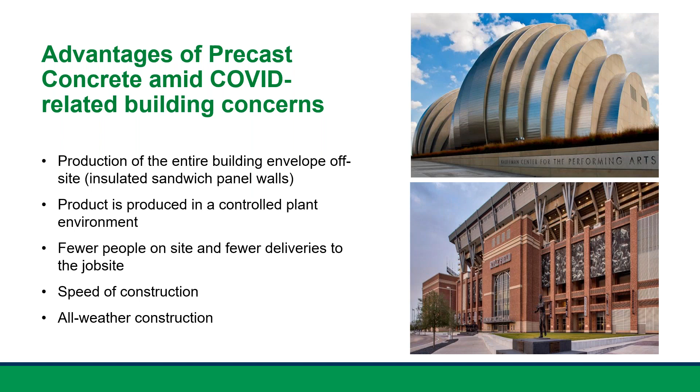Another goal we saw was having fewer people on sites and fewer deliveries to the job site. These panels ship out to job sites on flatbed trucks. They're typically very large panels, so there are fewer deliveries. As far as an on-site crew, you've got about half a dozen people - a crane operator, a few iron workers - really a minimum crew working on that job site.

Speed of construction became an important aspect. There was a goal to get on and off these job sites as quickly as possible. With precast, you've got 9 to 14 panels a day going up, so these projects do go up remarkably fast.

The aspect that became very important during the pandemic was the all-weather construction aspect of precast. A major challenge was that schedules were moving around on all the projects - delayed because of uncertainty, then picking up abruptly and in a big hurry, or delayed because of other trades or supply issues. Typically with other materials, you have that dead of winter period from December to February where you just have to stop. But with precast, as long as the footings and foundations are in place, they can install all year round. That's a huge benefit because you can get your enclosed building by winter, or even during winter. That's enough about the pandemic.

Let's talk about aesthetics.

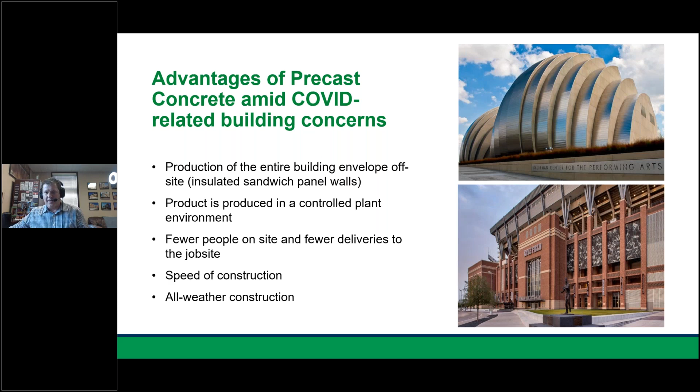What you see here on your screen is the 4 primary precast finishes, and I'll start at the top. Sandblast is the most common finish in the industry. There's light, medium, and heavy sandblast.

Each yields a slightly different appearance. It's an abrasive blast technique that starts to expose some of the rock to varying degrees. It's a more dull appearance.

Then you can do what's called an exposed aggregate finish, where a chemical retarder is sprayed in the bottom of the production bed. It keeps that surface fraction of an inch of concrete from curing. So when the panel is extracted out of the bed, because it is poured exterior face down, premium face down, they wash that surface concrete off and it exposes that rough rock.

Then you can do what's called an acid etch finish, which is a liquid-based application. It is the least invasive finish. It just knocks off the form finish, gives it a nice consistent appearance. It's many designers' favorite finish. It's my personal favorite finish.

And there's things you can do with mica sands and silica sands that can give it a glimmering appearance, almost like a sugar cube. And then there's also polished. We traditionally haven't done a lot of polished finish just because it's a machine process similar to granite, so that extra step makes it a bit more expensive.

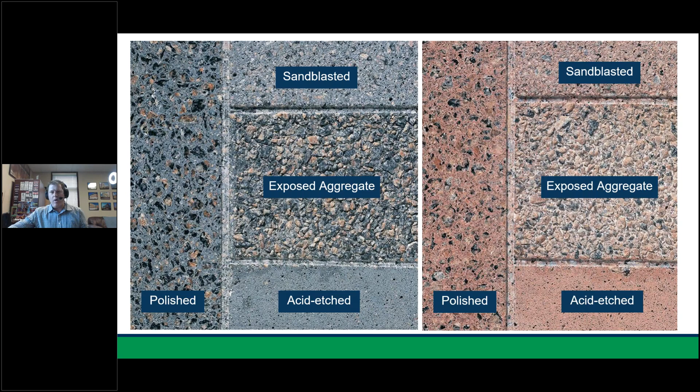We also encourage the articulation through forms, and whether you're going for a more traditional look or a more contemporary look for your school, this is something we really encourage to get you out of just that typical flat panel, flat plane design. You're literally only limited by your imagination with what you can do. You can get into quite a bit of detail.

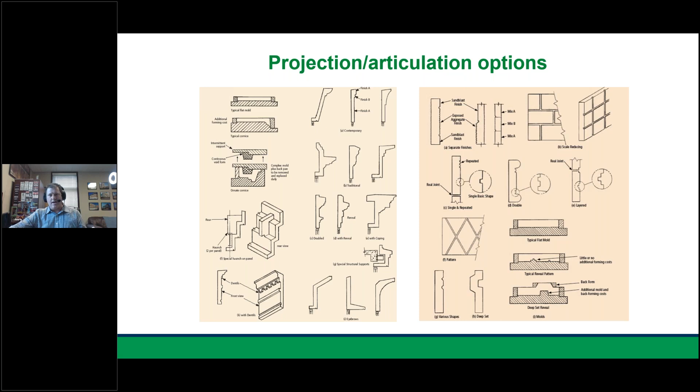What takes that additional projection and additional formwork and makes that less cost prohibitive is repetition. You can see on this project, they had some cornice work, some sills, some additional detail around the windows. But if you notice, they did that again and again. So repetition is a pretty big deal in the precast business, and that is a strategy to keep your projects within a reasonable cost range.

Another tool in the toolbox that you have are form liners, and these can be done with standard form liners, and you can also do customs. This IRS Service Center used a custom board form that was built in the production facility, and it employed another strategy we talked about earlier: the raised portions are acid etch finished, the lower portions are exposed aggregate. So you had two finishes in the same panel and the use of a form.

For Sporting KC's training facility, that's a soccer club in Kansas City, they have a diamond as part of their logo, and they wanted that branding to be part of their facility. So they did something a bit on the extreme side - that's actually a 7.5-inch projection on that custom form liner, but it yielded a striking result. Anytime it's hit in different times of the day with the sun, it's always got a different look, and it is a very visually impressive building.

And that's an example of something you can do with a custom form liner, but you can still see, even though it's custom, they utilize the repetition.

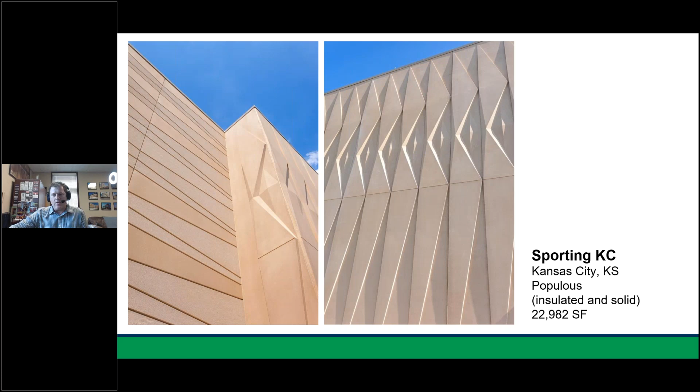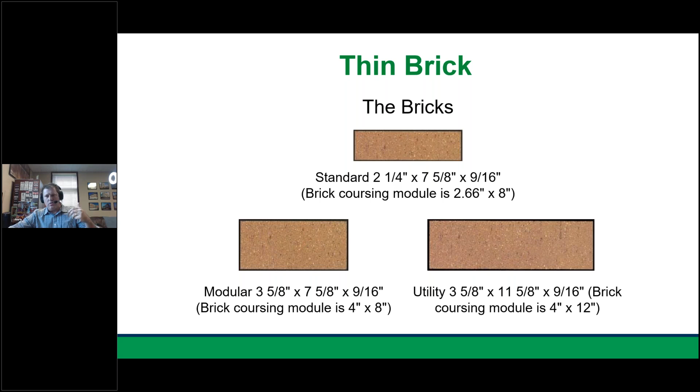Thin brick is another great tool in that toolbox. Your typical sizes are going to be standard, modular, or utility. There's a wide range of colors and textures that you can choose from, and you're not limited to running bond with a single color. You can do arches, projections, random blends.

There's all kinds of great things you can do from an aesthetic standpoint. The way it works is you can see here them putting the thin brick into the production bed. There's a form liner that's put down, and that form liner has a little curved lip on the edge that emulates a tuck point. Then when the concrete is poured directly on top of that, after the reinforcing is put into place, it bonds with the back of those grooves on those thin brick.

You can see on the right how they handle corner pieces to pull off that illusion that you're looking at a full brick, but it's actually about one fifth of a brick. So it's more cost effective, it's more efficient, and it's a bit greener because you've got a more lean, mean, and efficient design.

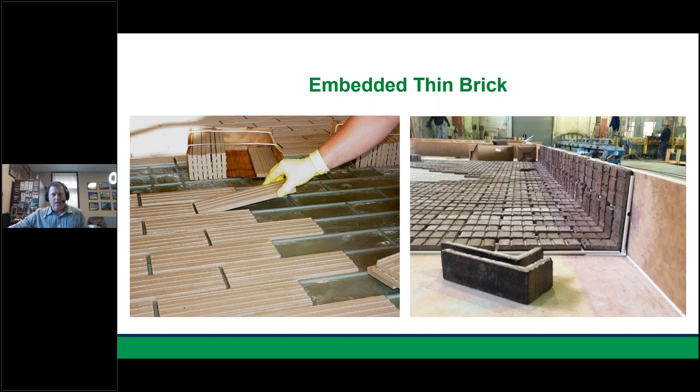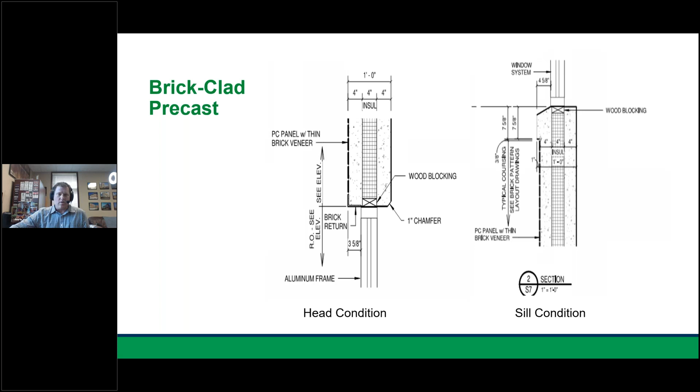In addition to having corner pieces, you can also have edge pieces at your head and sill conditions, and again, you can do arches. There's all kinds of strategies of what you can do with an embedded thin brick.

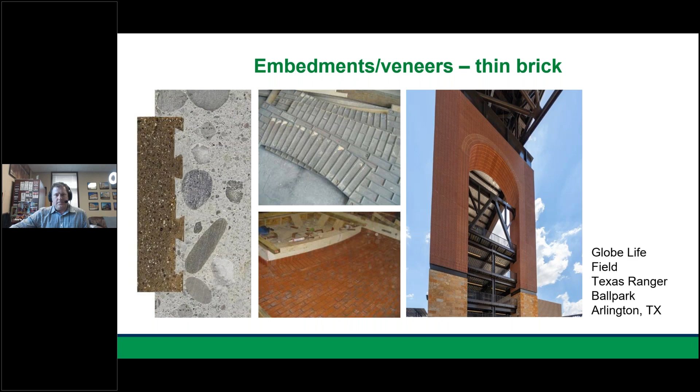Another tool you have, in addition to thin brick, is you can also embed stone or tile into your projects. The example on the left is actually a higher education school, a school of business out at UMKC, and this was originally envisioned as terracotta, and that is what you're seeing there is terracotta.

It was going to be set into a rain screen with an air barrier and a traditional wall built behind it, which would have been a non-precast solution. They realized they had a major budget issue with doing that, so the precaster was brought in to explore the idea of setting the terracotta into precast, which is done quite often now, but back then, around 8 years ago, it had not been done in the United States.

Through a lot of research, development, and testing, we did proceed on this project, and the terracotta was cast into an insulated sandwich panel. So you had the terracotta, 4 inches of concrete, 3 inches of insulation, another 4 inches of concrete, and it ended up creating a savings of over 30% on the building facade cost.

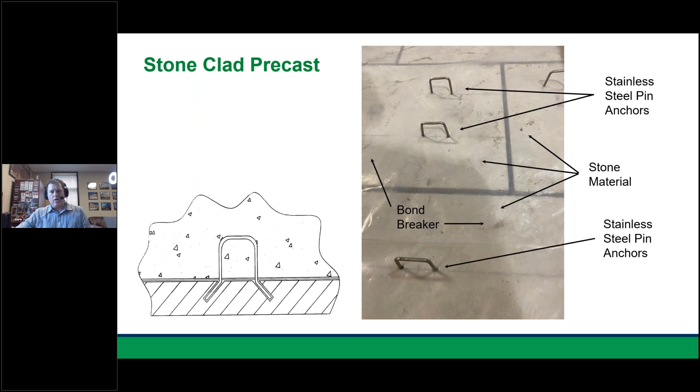So that is determined by the structural engineer for that specific solution. Another new finish we're seeing that could have some great application to schools or really any project is what's called the distressed finish. And this is something that is achieved with a powder at the bottom of the bed that actually gives the final appearance that grainy look.

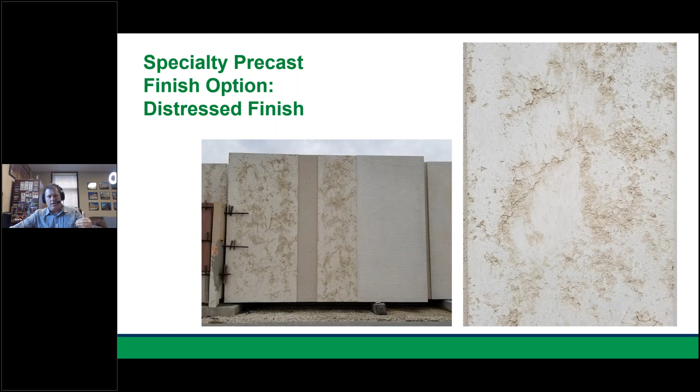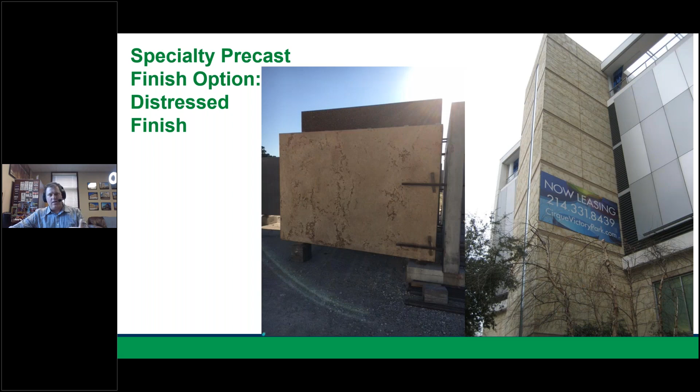Some architects have leveraged it through creative use of reveals. It can actually give the appearance of a natural stone, a travertine stone, but for a fraction of the cost of travertine. So we've seen it used that way on some projects.

On other projects, we have a partner in Texas called HKS Architects, and they just liked the look of it. So they wanted to use it more monolithically, so that it was used on a large scale in the Texas Rangers' new ballpark, which is where they played the World Series during the pandemic. And they used a few of those tools in the toolbox we talked about. You can see the thin brick there and these arched panels. You can see the distressed finish.

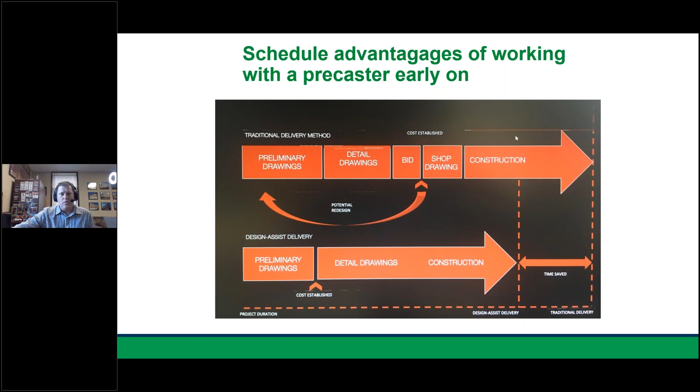So then all the other trades bid out at a later time, and you save a significant amount of time on your project, which with schools, they are time sensitive projects. They typically just have a certain window to build those projects, especially if it's an addition to an existing school. And there's obviously a lot of aesthetic flexibility with schools.

The sampling process typically starts out with a PCI color and texture selection guide. There are a number of 3-ring binders that are out there, but this also exists online on PCI's website, and many specific vendors host this information on their website as well. It's a good jumping on point because you can give a PCI producer a plate number based on those hundreds of choices you have in there, and then they can start to make physical samples, which we encourage.

The example at the bottom here, the precaster first did the sample on the left, then the architect said, we like it, but what would it look like if there were more dark aggregates? So they moved to the sample that you see there in the middle. And then they said, well, we like it, it's even better. Can we do a version where we punch up the dark aggregate a little bit more and go darker on the dye? So that's when the sample to the right was issued, and they said it's perfect.

They showed it to the owner, they got it approved, and they actually took a picture of that sample and they put it in with the specifications or with the addendum, and they even named the precaster as the basis of design.

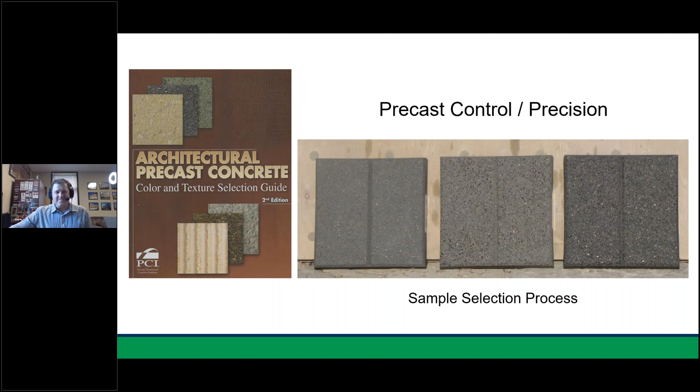Once a precaster's on board, though, they will commence a full mock-up process, and that is going to typically be at least a 4 foot by 4 foot panel, but we often see more elaborate mock-ups that are designed. Sometimes they want to show a window or different materials in the panel. It's a great process because you can really see what those reveals are going to look like, the depth of them, the size of them. There's sometimes even opportunities to make little tweaks at the last minute as well. So that's a very positive process, and it's emulating the full casting process. So that's important to see in your mix designs.

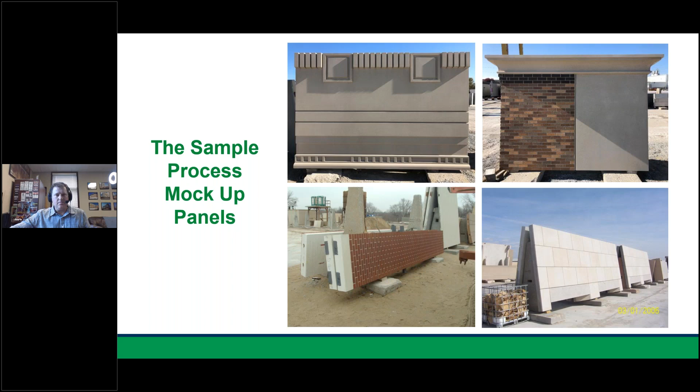With insulated sandwich panels, you have 2 wythes of concrete that are surrounding insulation. As somebody put it to me recently, he said, a precast sandwich panel, that's like precast on a diet. And it really is, because you've got something very efficient. It's going to be relatively light for a full building envelope system. You can put on the exterior either exposed precast with a finish, or in this case, you can see it's thin brick.

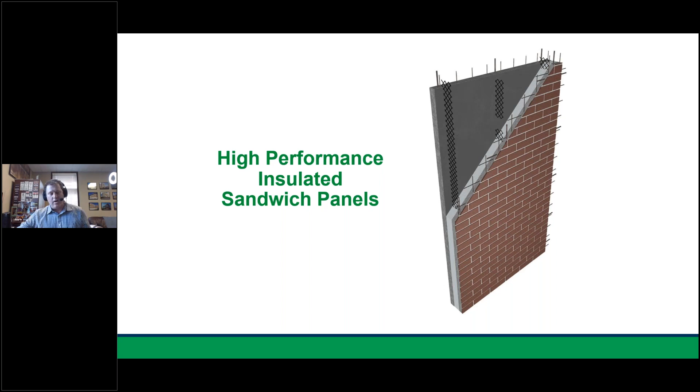It's going to be connected on the inside, there's a number of ways to connect it. It can be fiberglass pin connectors about every 24 inches on a grid system, or in this case, you're looking at a carbon fiber reinforcing grid that runs every 24 inches vertically, the entire height of the panel, giving it full composite action.

Another great benefit of precast, especially in schools that they know people are going to be in for a number of years, is the thermal mass effect. So you can see here the day-to-day cycles of temperature in a building when the heat is actually turned off or turned down during the evenings. And what you see there in the orange is a conventional building, and you actually see some pretty significant swings in temperature during those off-peak hours when the systems aren't running.

With precast, on the other hand, what you're seeing there in blue, there's less of a temperature differential. The precast thermal mass flattens out daily temperature differentials and therefore reduces the heating and cooling loads of a building's HVAC system. And the way this occurs is you could almost think of it as a battery. That concrete is absorbing that heat during the day as a building is being heated. And when they shut down those systems in the evening, it actually begins to slowly release the heat into the interior spaces during the late afternoon or the evening when these buildings are empty.

So when they show up an hour before the kids are going to show up and they boot up those systems again, it's less work for the HVAC system in the morning to rebalance that temperature. So it's energy savings that they'll see many times over the course of the project.

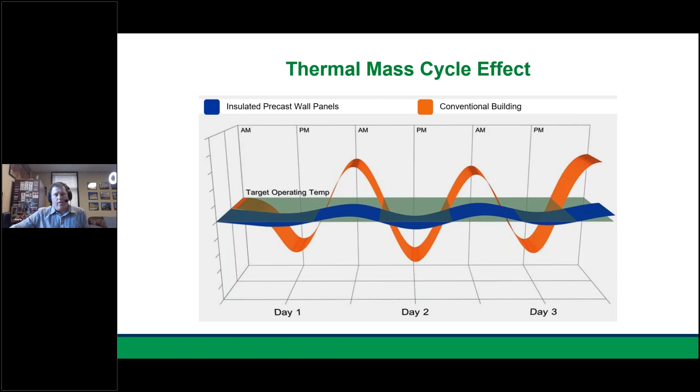There's a couple of ways to skin the cat with insulated sandwich panels. The top example you see here is what's called a non-composite panel. That is when you have a thick wythe of interior gray concrete, and it is doing all the structural loading and lateral loading and so forth. And then you've got on the exterior a thin veneer, and that thin veneer is actually just serving as a moisture barrier and as your exterior facade. It's not doing anything structurally. And then of course it's connected by a connector system, and that is a fine way to do things.

There's times on a high level FEMA high wind shelter where you want to do a non-composite panel for structural reasons. But all things being equal, another great way to do things is what's called composite panels. And that is where you have more equally spaced wythes of concrete that are connected in a way that they are actually sharing the loading on each side. So that's literally acting as one panel. So the advantage of composite is you can essentially, in some cases, do the same thing structurally, but it can be done with less concrete.

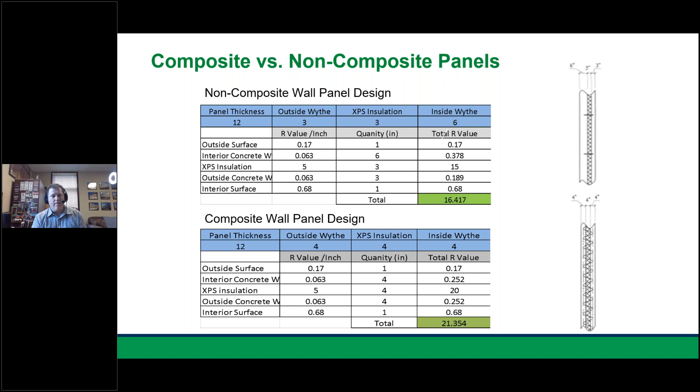And R value, obviously not to be confused with thermal mass. R value is the thermal resistance in a panel. You want your R value to be as high as possible. And thermal resistance can also be measured in a U factor, which is thermal transmittance. So you'd want your U factor to actually be as low as possible.

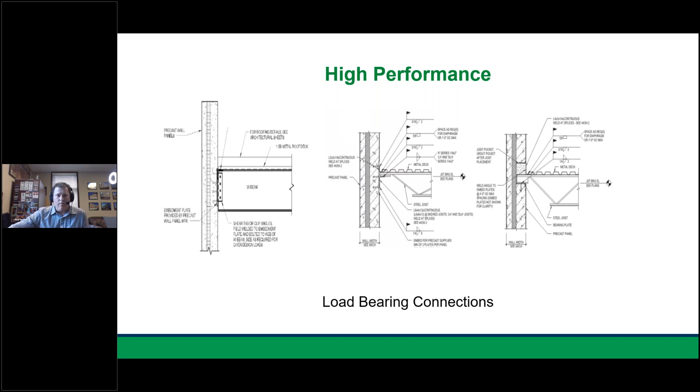And there's a few ways to go with load-bearing panels. And here's a few examples. You've got embeds that are going to be set into the precast. It can be either directly welded. There can be an L-shaped steel piece that the joist can sit on top of, or there can be pockets. And your precaster or precast structural engineer or engineer of record can help you as an architect to make that best decision for your project.

But one thing I will tell you, if you're working with composite panels, a good chance something you'll run into eventually is a situation where there is an embed or a slotted connection that needs to fit on the interior but doesn't have quite enough space. And in that case, you can actually notch into the insulation. It's okay to do it just in a small zone.

You can even get it down to 1 inch, but the key is to not fully break that insulation. You want to continue the continuous insulation per the ASHRAE standards. You want to maintain that thermal break and not have any kind of thermal bridge between the panels. So that's just something to watch out for during the shop drawing process.

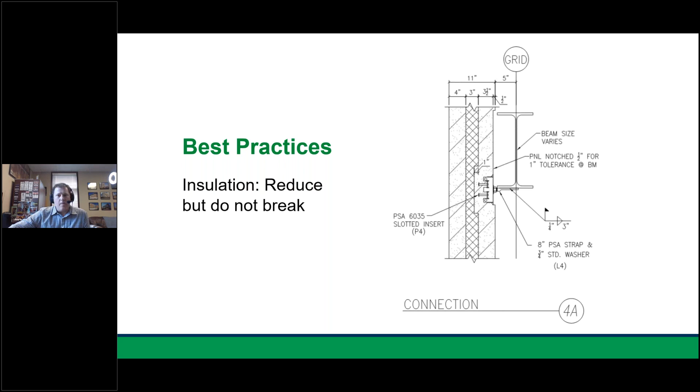There's a few ways you can go on the corners. The left is a miter joint, which is a nice way to dress up an integral color panel. L-shaped pieces can be done. That's a little bit of an extra step. It would be a 2-day pour. They'd pour one side, then the other side the next day. They would turn it up, pour the other side the next day with a cold joint.

We see that a lot on column covers where they want to have 2 pieces that go together instead of 4 pieces. And you can do the traditional butt joint. If you're doing a thin brick project, you'd want to do a butt joint as opposed to a mitered joint so that you can really sell that illusion of that thin brick being a full brick.

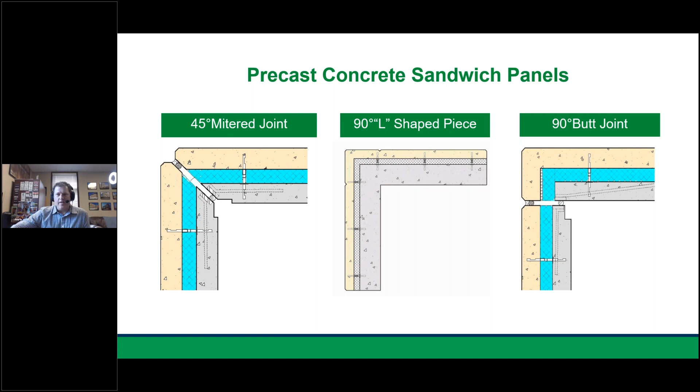We're not going to talk a lot about high wind structures. There's been some other hour-long seminars that have covered that quite thoroughly, but I did want to say what we typically see for precast: you will see a gymnasium area like you see in the blue here on the bottom of the screen, where they'll take a high volume space, they'll put a double T roof in it, it'll have proximity to restrooms, and that will serve as your high wind structure. These tend to be very beefy, very heavy panels, but they work really well.

An interesting trend that we're starting to see around Iowa and Nebraska is architects are figuring out if they actually take a lower volume space and make that their FEMA shelter, like you see in the yellow, either a multi-purpose room, a cluster of classrooms, maybe a library, something ideally with proximity to restrooms, they can do it with lower walls, and so they've got less premium wall space. It's something that's done for economy. It keeps the cost down.

In some cases, they'll use a steel roof instead of a double T roof. I can't get a lot into the specifics of cost because of some antitrust stuff, and there may be some debate the way cost trends are going now whether you're really getting any savings with a steel truss roof. But that is something to look at when you're really pinching pennies on projects.

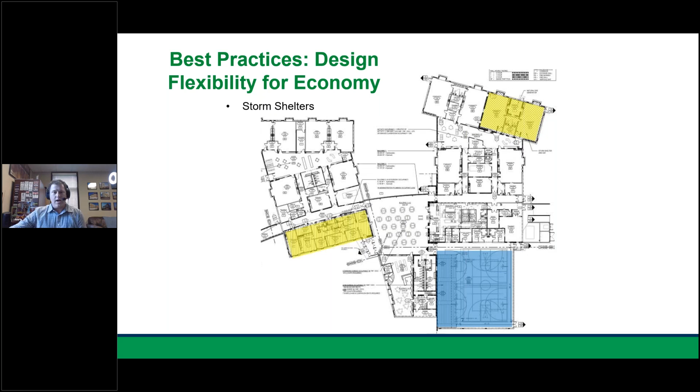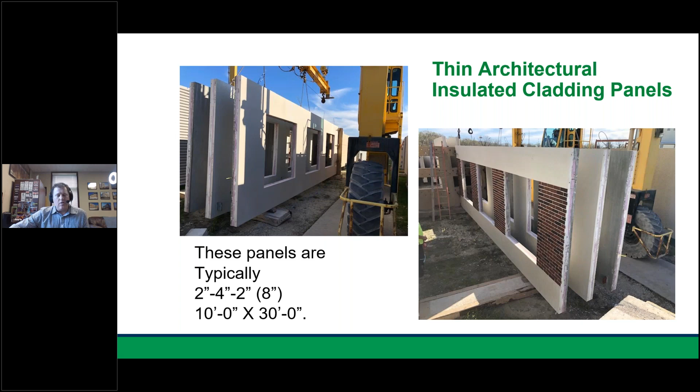You're cutting your concrete in half, so your panels are going to weigh less. There's going to be less shipments to the job site, a little bit less of a crane that you'll need to install those, and they can even right size the footings and foundations, because at 50 pounds a square foot, that is actually less than it would weigh to do a conventional masonry system with a backing wall built behind it. So I would encourage you to talk to your local precasters about that option.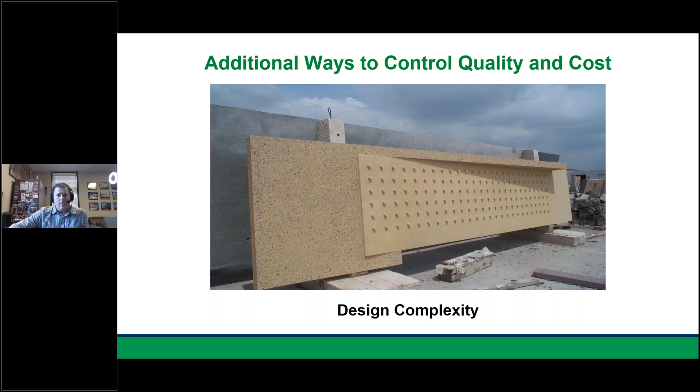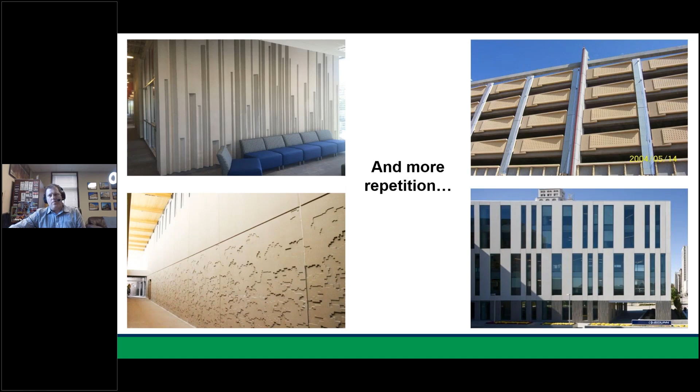And I'll circle back to the idea of taking these complex panels like this with curves, multiple mix designs or multiple finishes, board form patterns. The way to see some economy in doing that is through repetition, whether it be a high-end parking structure or with form liners, board forms, similarity of pieces. That's a way to control some cost.

So I'm going to cap this hour here with a quick discussion on PCI certification, and I want to leave some time to ask questions. So PCI is an organization that, in order to belong to, members get 2 unannounced audits per year.

They basically don't know when the independent inspectors are showing up. They take the shop drawings out of the foreman's hands. They check the curing, the reinforcing strength, the quality. They talk about safety, finish capabilities, and it's something that in order to belong to it, you just really have to maintain a high standard. So that's the benefits of PCI.

They revamped their system about a year ago because of new technology advancement that allowed for even higher standards. So it was a way to align producers based on their capabilities. They got feedback from over 160 producers, architects, and contractors who work with precast a lot and had a lot of opinions, and that went into effect October of last year.

So the previous categories were A1, which was a bit of a catch-all for architectural panels, CA, which was more industrial panels, warehouses, stadiums, double Ts, and AT, which is small projects, trim units. So what's happened is A1 and CA have been broken up into 4 categories, and that is what's called AA. That has a heightened tolerance that didn't exist before, with great emphasis on shapes and complexity.

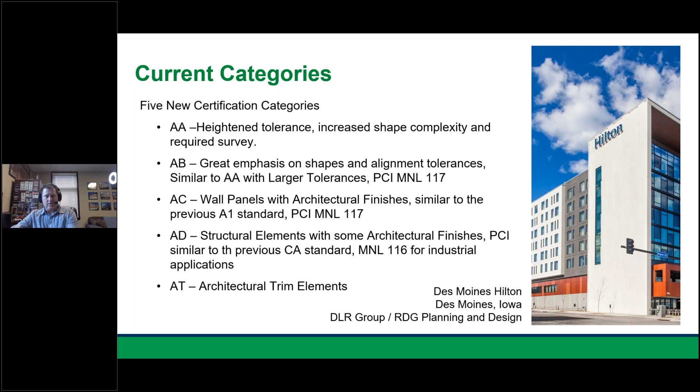So I think this will come together for you a little bit here. Going left to right, AD projects are going to be your warehouses, your more simplified big box stores. They do allow you to do an architectural finish and thin brick, but for all practical purposes, most AD projects are going to be structural gray projects that are field painted.

With AC, you've got more of your typical architectural panels. You can do a finish, or more than one finish on the same panel. So some of your more simple schools are going to fall into that AC category. Depending on how much complexity you've got on your school facade, you might consider AB.

AB is where you can start to do curves. You can start to embed other materials like stone and terracotta, so you can embed things besides thin brick. There's more emphasis on projections and shapes, whereas AC panels tend to be a little more flat in nature.

And then there's AA, which is kind of like that on steroids. It's a tighter tolerance that has not existed before. These would be your campus performing arts centers, your cathedrals—the projects that are so particular and have so much scrutiny, they have to go just right.

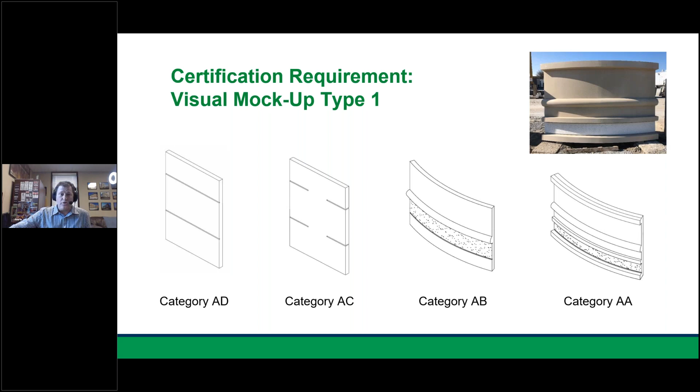Here you can start to see, in order to go through that certification process—there's an AA sample mock-up in the top right corner—but for AD, you need to be able to do a flat panel with a reveal. With AC, that reveal needs to turn the corner and stop abruptly. With AB, you need to be able to do more than one mix design in the same panel, do curves, and do projections. With AA, you do that with more detail and some additional tolerance. Same concept for thin brick, and a very similar concept for form liners.

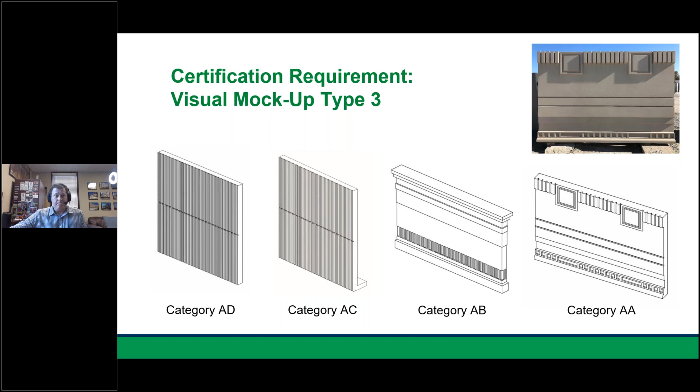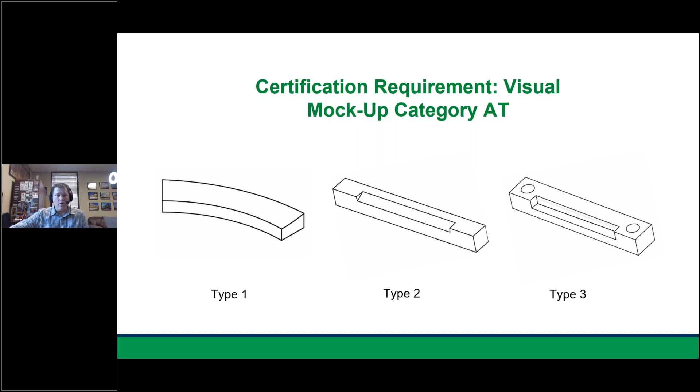With AT projects, that category has largely remained unchanged, but there is an emphasis on samples to make sure that they can do that project with the precision that is required.

We're not going to get real into the weeds here, but there's a whole manual that covers this. To give you a helicopter perspective on the tolerances, for panels over 20 feet long with AA, you're dealing with tolerances within 1/16 of an inch. With AB, it's the old 117 standard, which is 1/4 of an inch. Same with AC, and then with AD, that loosens up to 1/2 an inch.

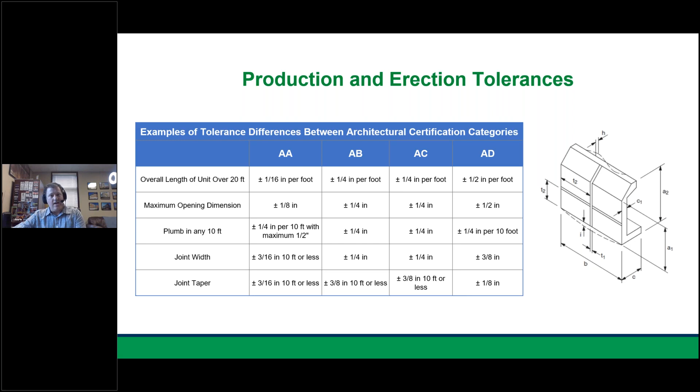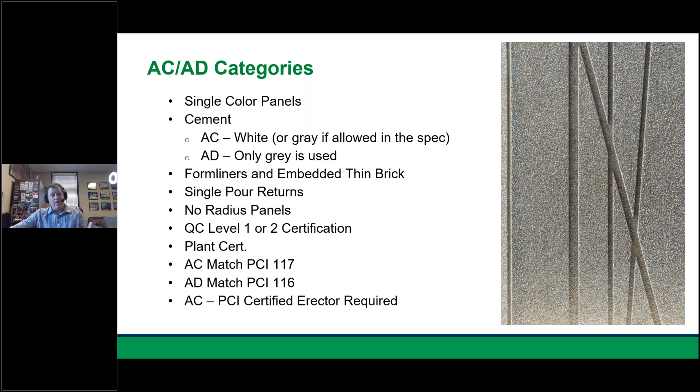For AC and AD categories, you've got single color panels. You can do thin brick, form liners, single pour returns. For anything AC and above, a PCI certified erector is going to be required.

When you step into the AA and AB categories, you're getting into multiple colors within a single panel. You can embed not just brick, but stone, tile, terracotta. You can do curved panels, those L-shaped pieces we talked about, and cold joint returns.

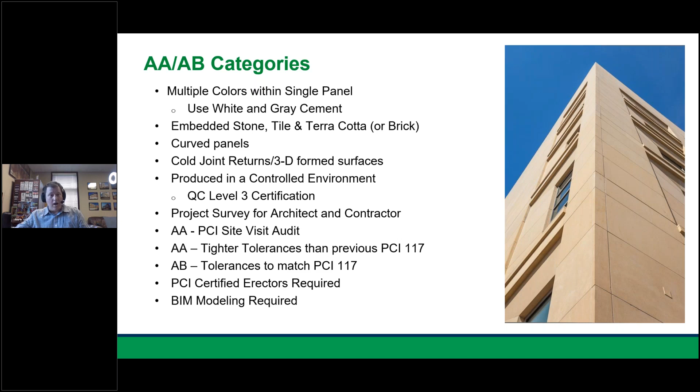AA steps into a tighter level of tolerance than has ever existed. These projects will have a project survey by an architect or contractor, which is a new level of accountability that didn't exist before. AA projects are also going to have a PCI site visit and audit for each project, which is an additional level of accountability.

For AB, this business school at the University of Kansas—if there's any KU fans here—is across the street from Allen Fieldhouse. You can see the projections here come out to an apex, a point, and it's interesting when the sun hits it at different times of the day. There's an emphasis on additional forms and tolerances, with each panel having a different theme—some flat panels, some with things happening in different planes, some copper, so you've got precast playing well with other materials, some cantilevers, and a big hall on the inside at Capitol Federal Hall in Lawrence.

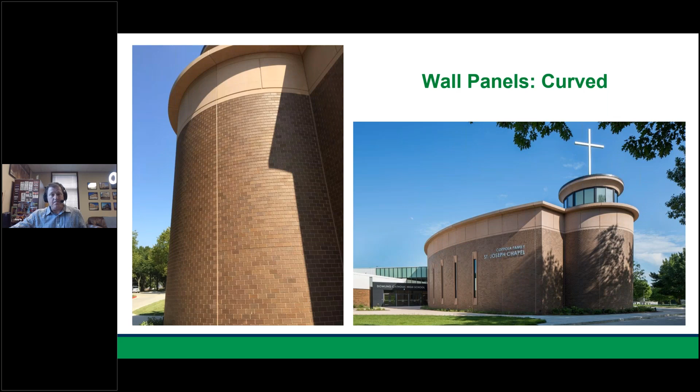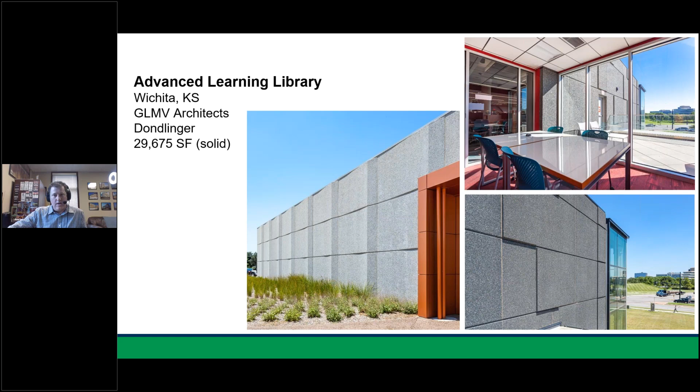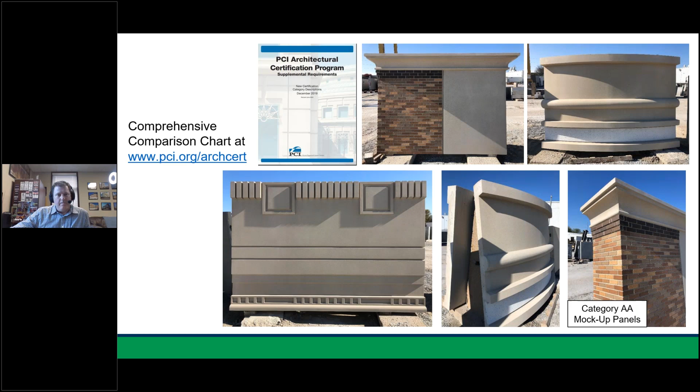And if you're saying, oh wow, that's a lot of information, it is in terms of the certification. So I'm going to leave up on the last slide here a website that you can go to learn more information. In fact, I'll just go ahead and go to my final slide here and show you, if you're interested in reaching out to me personally, you can reach me at enterpriseprecast.com. I also encourage you to go to pci.org/PCI Midwest to explore the full range of PCI Midwest producers.

You got some great producers doing impressive work. And if you go to pci.org/archcert, that's where you can learn more about the PCI certification system.